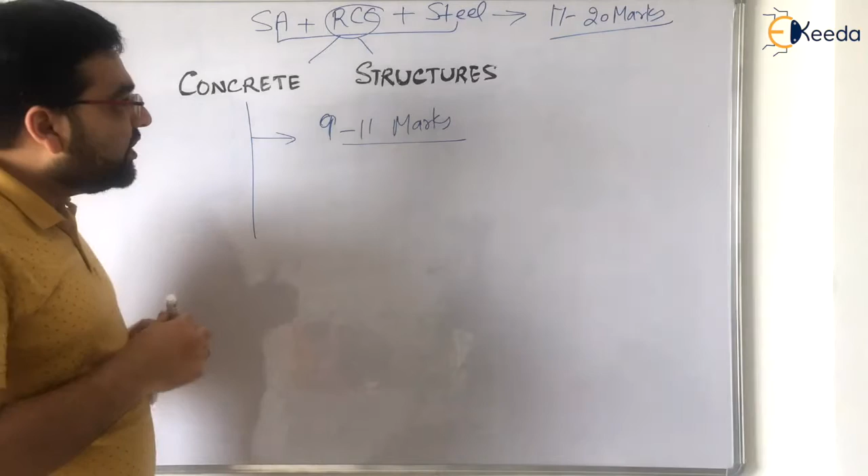If I consider RCC or concrete structures alone, it carries around 50 to 60% of those marks. That means out of 17 to 20 marks, concrete structures or RCC will carry around 9 to 11 marks. This is very important. I have seen people with good command on RCC or concrete structures get a very good rank in GATE examinations. This subject carries around 9 to 11 marks, and this year too it has around 8 to 9 marks. This year's 2020 GATE, and previous years, it has had a huge weightage. So we will focus on concrete structures and secure as much as possible.

Now, in concrete structures, the first lecture would be about cement, its manufacturing and types. You will also study cement in building materials, but I will teach you the topics important for designing concrete structures, for example shrinkage, creep, and other properties. You must also know the IS code specifications - IS 456-2000. We will be using IS 456-2000, this is the Bible of concrete structures.

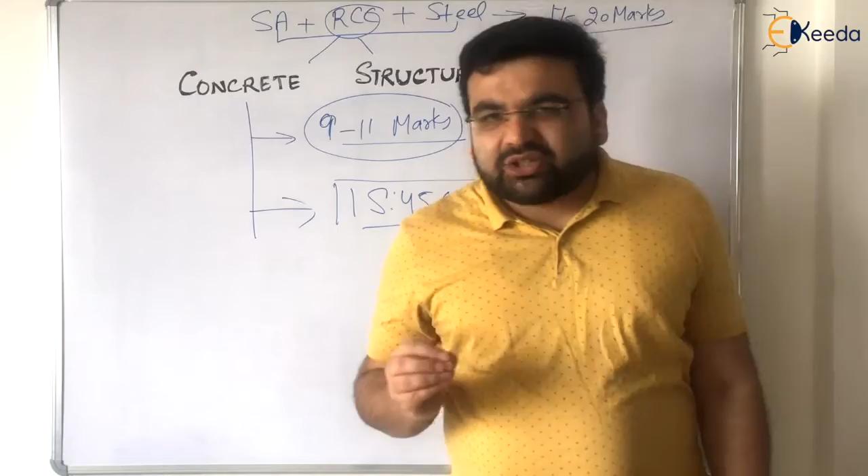IS 456-2000 - whoever is watching my video and doesn't have a hard copy, I strongly recommend going to a photocopy shop or downloading it from the internet and getting a hard copy of IS 456-2000. Remembering every clause of IS 456-2000 is almost next to impossible. Even toppers cannot remember every clause because it's a very thick IS code. But I will teach you only those clauses which are very important from the GATE point of view, in detail. Otherwise there are a lot of clauses and it will be very difficult to remember all of them.

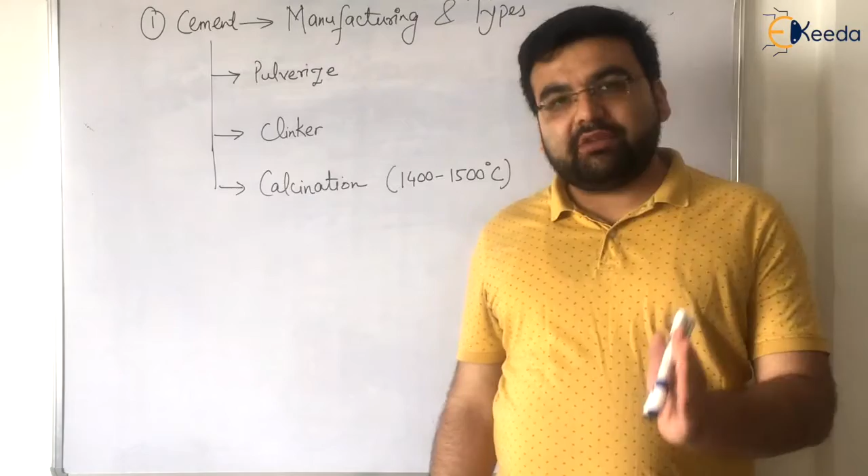Now let me start with concrete structures. The first lecture I will teach you is about cement manufacturing and types. Let me tell you about the first topic in RCC, reinforced cement concrete structures - cement manufacturing and types. First, let us know what cement is. You must be knowing, since you are in civil engineering, that cement is the basic of civil engineering. Every concrete structure has a basic constituent in it known as cement.

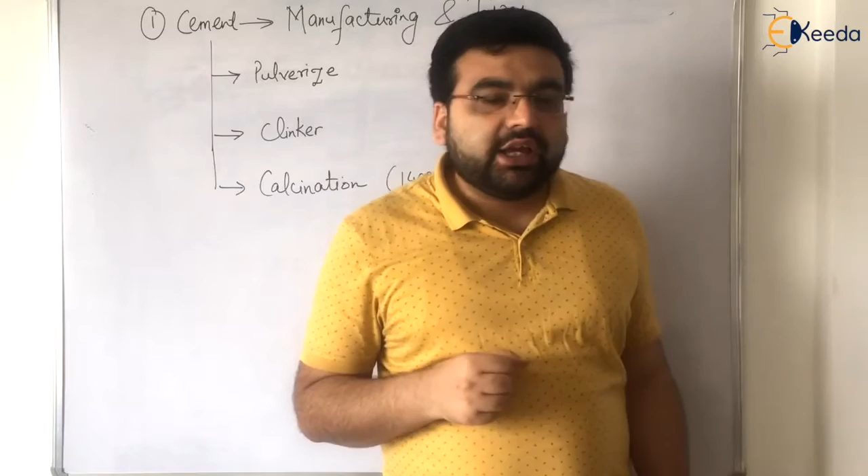Now what is cement? What type of role does cement play? What is meant by cement? Cement is basically a mixture of argillaceous as well as calcareous compounds.

I will tell you about that - what is argillaceous, what is calcareous.

Cement acts as a binding material - this is very important. You know that in concrete you have aggregates: fine aggregates, coarse aggregates, water and other constituents. You can also have admixtures, mineral admixtures, chemical admixtures - a lot of things depending on the type of cement. Now, cement plays a very important role: it actually binds all the particles.

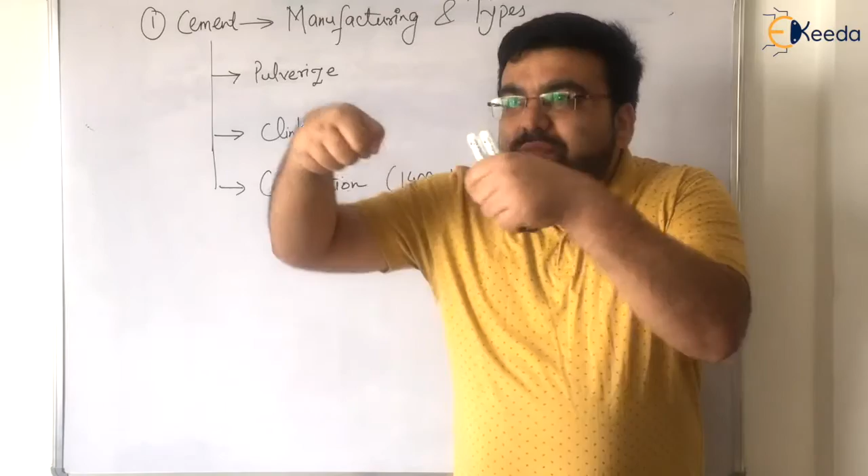For example, let us say you have two rods and you want to make an angle. How will you make an angle? You will connect the two rods and do welding. Now if you don't do welding, is it possible to make an angle? No, not at all. It is not possible to make an angle without either bolting or welding.

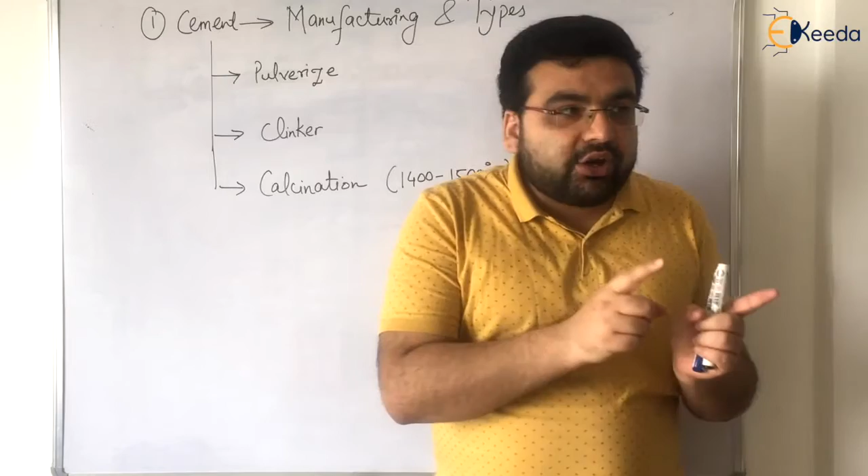Similarly, you cannot form concrete, you cannot form PCC or RCC. PCC means plain cement concrete, RCC means reinforced cement concrete which has steel in it. It is not possible to make these two without the help of cement. So cement actually plays as a binding material of all the particles.

For example, let us say this is cement, and let us say this is RCC. It has steel rods in it, it has cement, it has aggregates - everything, right? Now these are the aggregates.

You add some water as per Abraham's law, the water-cement ratio. Now the cement actually binds the particles, like with the rod, through interparticular attraction. It binds the particles - without cement, you cannot form concrete. So cement is very important.

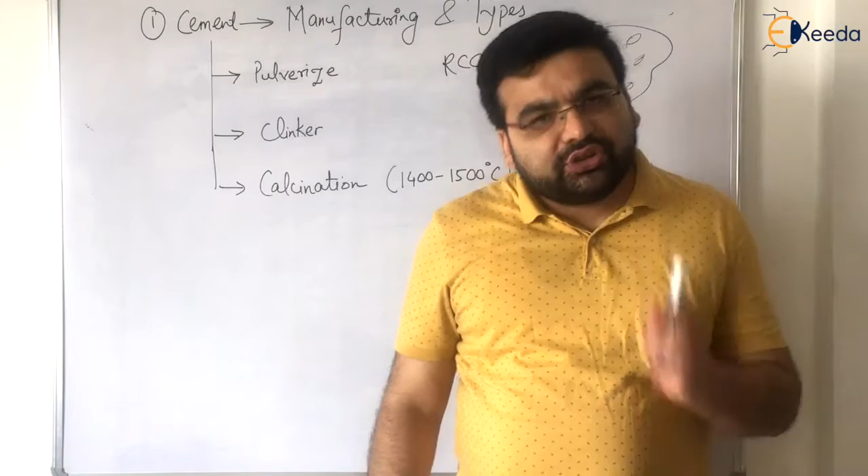When I am teaching you about cement, it should be known to you how cement is manufactured - what are the constituents of cement, and if we increase the amount of a particular constituent, what will be the effect of that constituent on the properties of concrete. All these aspects must be known to you.

So starting with cement - how is cement formed? Now if somebody asks you what is cement, you will say that cement is basically formed by pulverization of clinker followed by calcination. Again I am repeating: pulverization of clinker followed by calcination. This is the basic definition of cement.

Now let us focus on these three points. First is pulverize - what is pulverize? Pulverize means basically breaking, that is pulverization, breaking of particles. Cement is formed by argillaceous as well as calcareous compounds. Argillaceous means which have major component of alumina in it. Calcareous have more component of calcium in it. So cement is formed by argillaceous plus calcareous compounds.

Now, what is clinker? Clinker is a powdered form, not a very fine powder - it can have coarse powder also, a mixture of both fine as well as coarse particles. So clinker is basically a powdered form.

Now, what is calcination? Whenever you hear this term calcination, always remember we have to heat it. So we have to heat it at what temperature? This question has been asked many times - not in GATE examination, but in other examinations. At what temperature does calcination take place? Always remember, it is between 1400 to 1500 degrees Celsius - this is important.

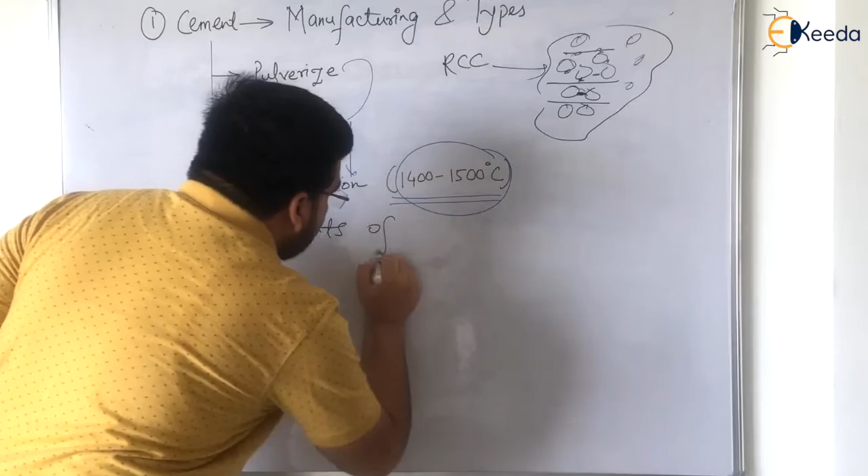Components of cement. Now let me explain you the components of cement.

Cement has lime, alumina, silica, magnesia, and iron oxide also. Now, the important question is what is the percentage of all these elements? That is very important for you to learn. I will explain a trick by which you can learn all these components. First, let me tell you what the components are, their percentage, and plus what is the role of that particular component in cement.

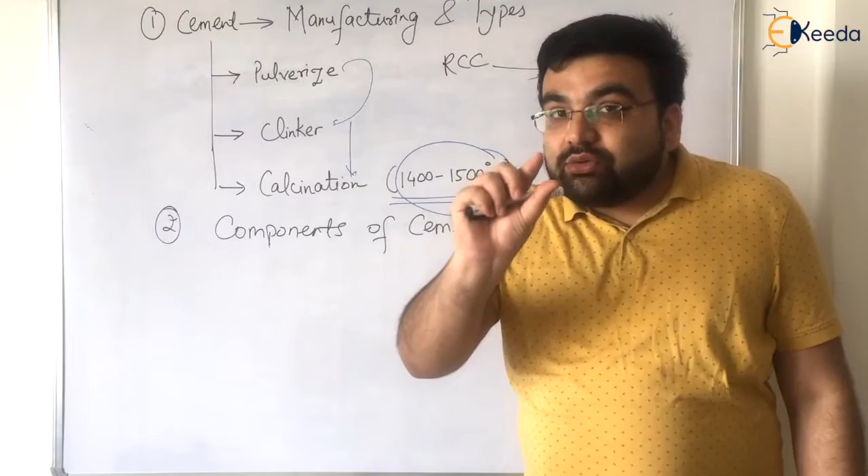For example, some component provides color, some provides hardness, some provides strength, early strength, late strength. So what is the function of that particular component? I will explain you that.

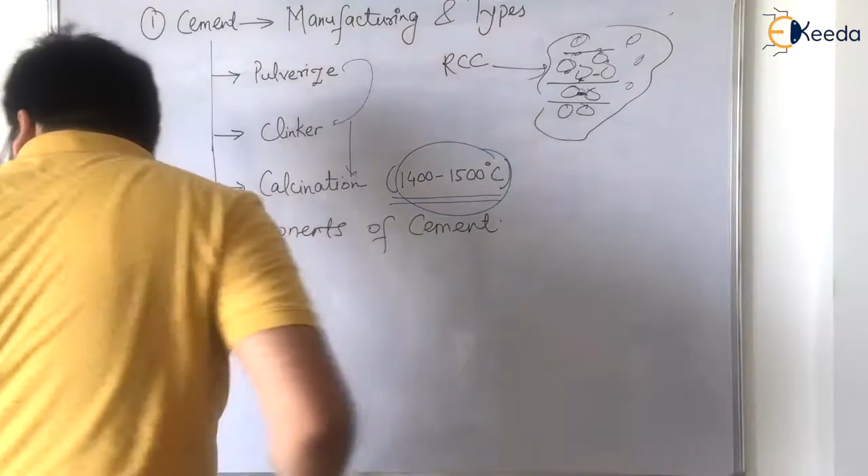Okay, so first of all, let me write down what are the components in cement. Let me rub it and write it down. Components of cement. Now I have written all the components which are present in cement.

Now let us discuss each and every component one by one, because this is important. This has been asked many times. Okay, now the first one is silica, SiO2.

The percentage of silica is in between 17 to 25%. If somebody asks you the exact percentage, just tell him it is around 20%. But the percentage varies between 17 to 25%. Now the function of silica is that it provides strength to cement.

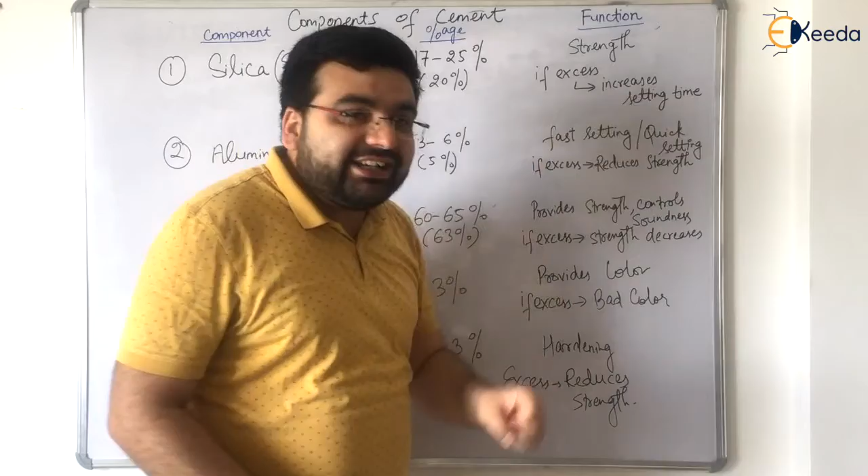But sometimes the percentage of silica is in excess, meaning more than 25%. Then what will it do? It will increase the setting time. Why have I written 'in excess'? Because this question has been asked 2 or 3 times in GATE examinations, previous years like 1996, 1997, older GATE exams. So this question has been asked: what will happen if silica is in excess in cement? It will increase the setting time.

Second component is alumina, Al2O3, aluminum oxide. The percentage of alumina is in between 3 to 6%, to be more precise around 5%. What does it do? It decreases the setting time, or you can say the cement sets quickly due to the presence of alumina.

Now if alumina is in excess, what will it do? It will reduce the strength. This question has not been asked yet, but still I have written it, because they might ask this question in the near future. So if it is in excess, it will reduce the strength.

Now the third component is lime. The percentage of lime is the highest. This question, which component has the highest percentage in cement, the answer is lime. This question has been asked many times in state exams, sometimes in ESE examination also. So it's important that the highest percentage in cement is of lime, CaO. Now what does it do? It provides strength and controls the soundness.

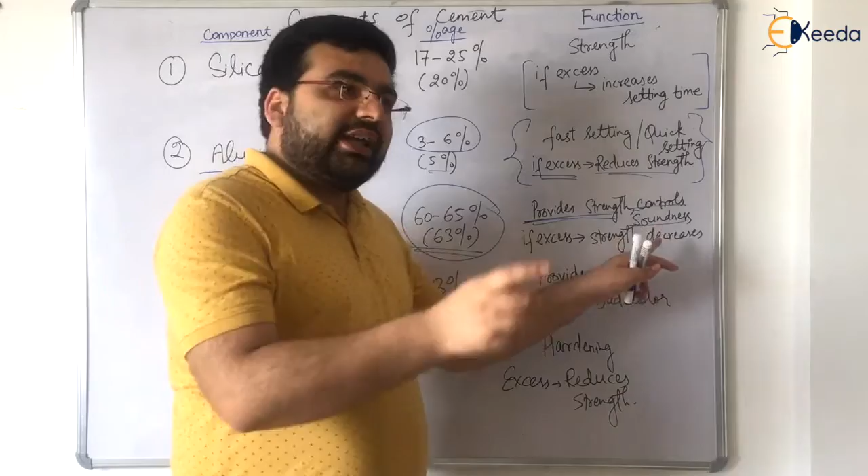For example, let us say you have concrete. If the temperature is very high, what will happen? The moisture component will evaporate, the water will evaporate from concrete. What will happen? It will shrink. So basically, this shrinkage or expansion of cement is known as soundness. Why does it happen? It happens due to the weathering action. For the time being, just remember that due to the weathering action, the expansion or contraction of concrete or cement is known as soundness.

Now if lime is in excess, what will happen? It will decrease the strength. This is important. Now the next one is iron oxide.

Now regarding iron oxide, for the time being I am explaining about cement, but in future whenever you have any question regarding color, I'm repeating: in any question, if there is something mentioned that color is due to a component, the answer most probably will be iron oxide, because iron oxide plays a very important role in imparting color to cement.

So it provides color, but if it is in excess, what will happen? It will give you bad color, okay? And the percentage, it is nearly 3%, right?

Next one is magnesia. It is in between 1 to 3%. What does it do? It provides hardness to cement. But if it is in excess, obviously it will decrease the strength, it will reduce the strength.

Now, the important thing is, I told you that I will tell you a trick to remember this, because silica, alumina, lime, sometimes you might forget it. What is the trick? Now remember this thing:

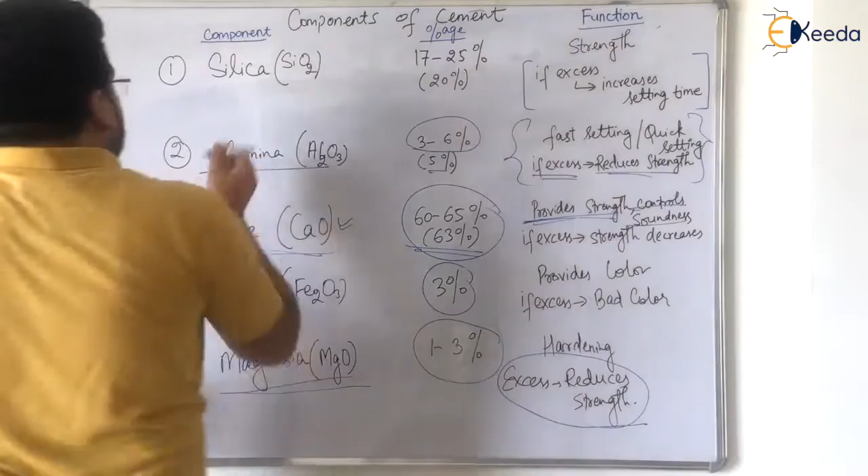SALIM. It might be the name of your friend, the name is Salim, right? So just remember this name: SALIM. S means silica, A means alumina, L means lime, I means iron oxide, M means magnesia.

Just remember this thing, and you will remember the percentage also. How to remember the percentage? You can form any phrase, because when I was in college, I used to make a lot of names like Salim, right? Similarly, you can remember this also.

For example, it is 17, so 17 let's say is S. This is 3, let's say it is T. 6, now this is S. 3, this is T. And this is again 3, T. So S T S T T. Similarly, you can make your own.

But this thing you have to remember, that is Salim, right? Because when you are in examination, there is huge pressure, so it becomes difficult to remember, or you might forget iron oxide, you might forget lime, anything you might forget. But if you remember the name, you can easily write down the answer and recognize it. So Salim is the keyword, and that is how you remember the percentage. You can make your own.

Now moving to the next part. Apart from these basic components, cement also has some additional components like gypsum, silicon trioxide, and other components also. So now let us discuss these other components and what are their functions. Now let me rub it.

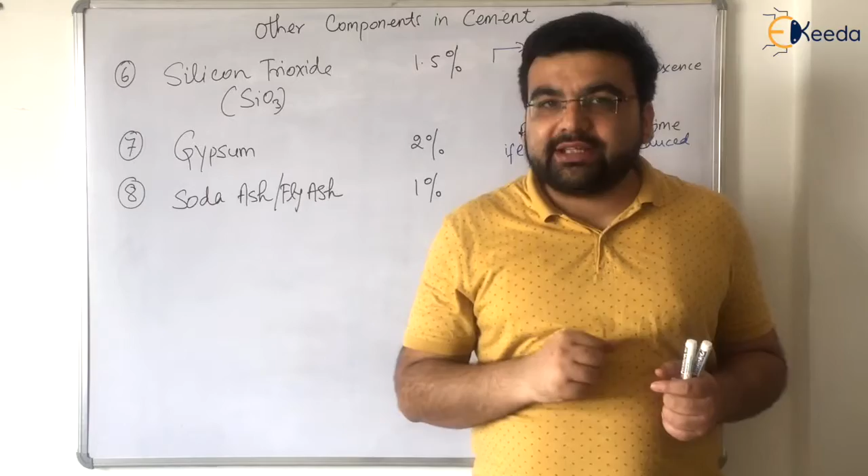Now this is very important, because in GATE examinations they are not asking you the usual questions, like what will be the effect of alumina. Everybody knows that. But they will ask you about some exceptional things. So this is the basis of GATE examination, right?

Now other components: we have silicon trioxide, SiO3. It has a very minimal content, around 1.5%. What it does is it helps in the fusion of clinker. Fusion means, for example, you have argillaceous as well as siliceous compounds. You heat the clinker, which is known as calcination, and at that time, there should be a fusion. So silicon trioxide helps in fusion.

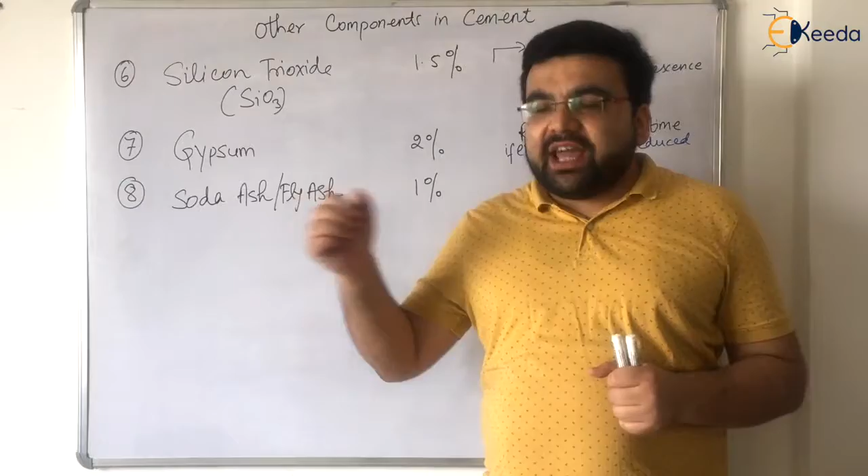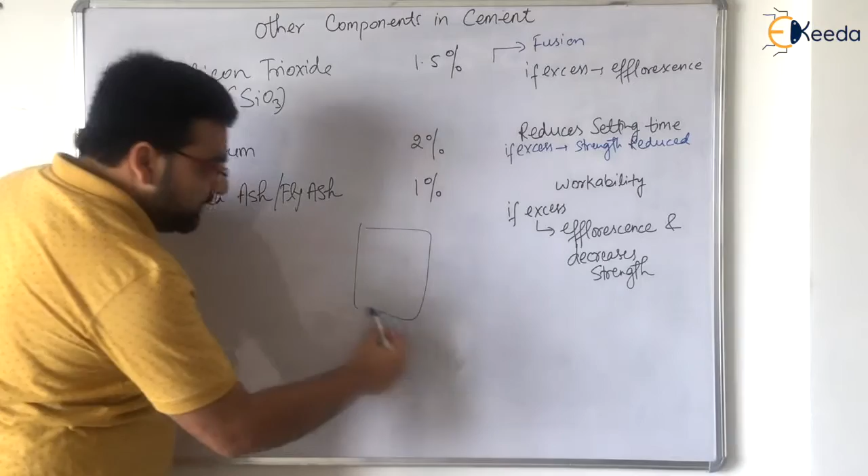But if it is in excess, efflorescence will happen. Now what is efflorescence? For example, a newly built house is there. After 4 to 5 days, if it has not been painted, you go to the house and you will see that on the wall there will be some powdery substance accumulated over the surface. That is basically some salty components coming out. That procedure is known as efflorescence. So if silicon trioxide is in excess, it will cause efflorescence.

Now coming to the next component, that is gypsum. This is important, this question has been asked many times, even in GATE examination and other examinations. The quantity of gypsum should be around 2%. If it is in excess, it will reduce the strength of cement. Now, the question which has been asked is, what is the effect of gypsum on cement? What it will do is reduce the setting time.

Now the question is, what is meant by setting time? For example, you have concrete, and concrete has cement in it. Now suppose concrete has been laid over a surface during monsoon season. You don't want that cement to be in a rough stage for a longer period of time, because rain can wash it away. So at that time you need fast setting cement.

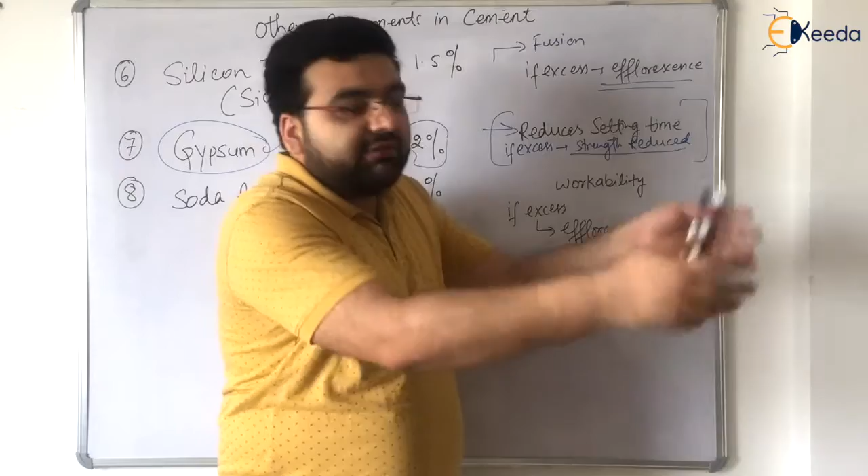So if you want fast setting cement, you must have some gypsum in it, because it will reduce the setting time. Once the structure has set, it is not yet hardened, but it is set. It means that if rain comes, the water will flow away and will not get penetrated into the concrete structure. So that is the meaning of reducing the setting time.

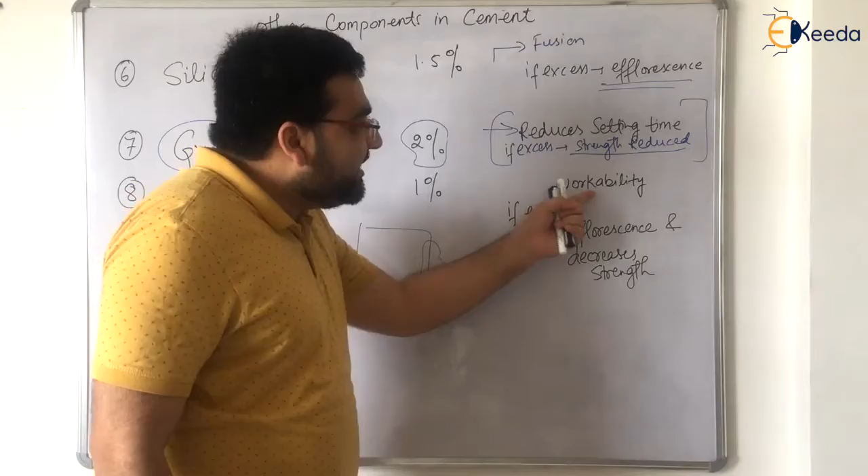Now next is soda ash or fly ash. They are present around 1%, and what they do is increase the workability. Now, what is workability? For the time being, in simple sense, workability is the ease of handling concrete. For example, if someone says this concrete is highly workable, it means you can pump the concrete to a longer distance. If it is lower in workability, you cannot pump it to a larger distance.

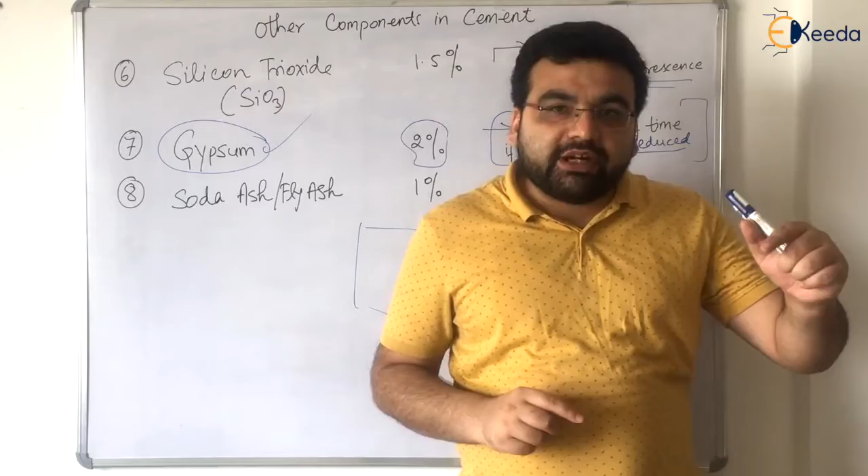Workability is majorly affected by the water cement ratio. If it has a higher water cement ratio, workability will be high; if lower, workability will be low. And workability is inversely proportional to strength. If a particular concrete has higher workability, it will have lower strength, unless you have added some admixtures. If it has lower workability, it will have higher strength. We will discuss that also, but for the time being, fly ash accelerates the workability.

Now if it is in excess, efflorescence will come again and it will decrease the strength. So these are the effects of some other components.

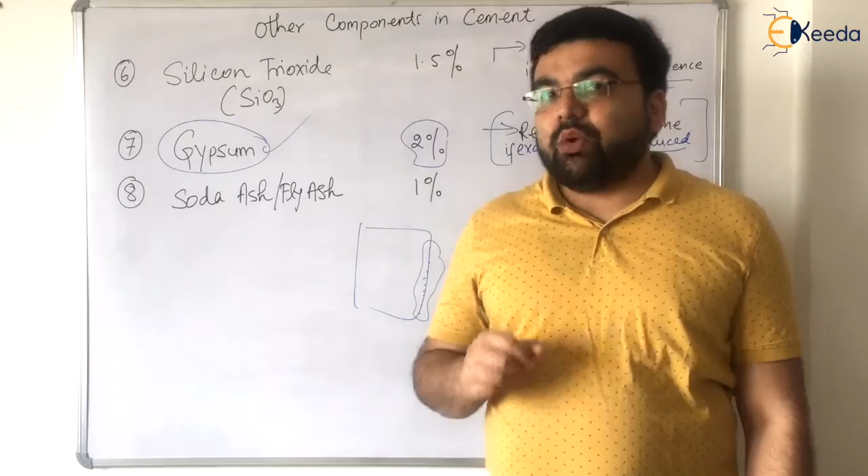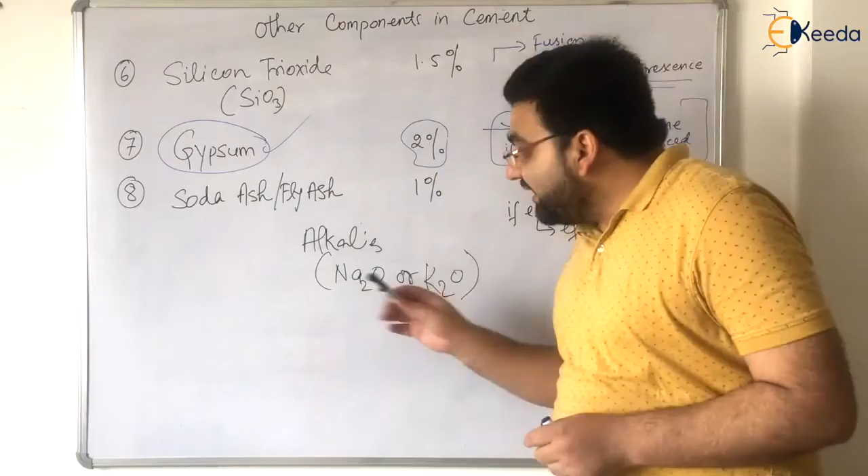Now one question was asked a few years back in the GATE examination: if some alkalis are present in cement, what will happen? By alkalis, I mean Na2O or K2O or something like that. If alkalis are present, what will happen to the cement? They will reduce the setting time. Remember this: if alkalis are present, they will reduce the setting time. So this is the effect of alkalis on cement.

The next topic is hydration of cement. Now what is hydration? You must know this from class 12th also. If you add something to water, an exothermic reaction takes place. That whole reaction is known as hydration. Hydration means adding water and getting an exothermic reaction. Similarly, in case of cement also, what will happen?

You must have done these experiments in your college also. If there is cement and you add some water, an exothermic reaction will take place. What is an exothermic reaction? It is the reaction in which heat is evolved. So similarly here, cement plus water gives an exothermic reaction.

Now, why am I focusing on this word exothermic? Because a question was asked a few years back: if you decrease the temperature of the surroundings, listen carefully and apply your brain, will the reaction of cement be hastened or slowed? Just apply your brain. A lot of you must have told me the reaction will take place at a faster pace. The answer is correct.

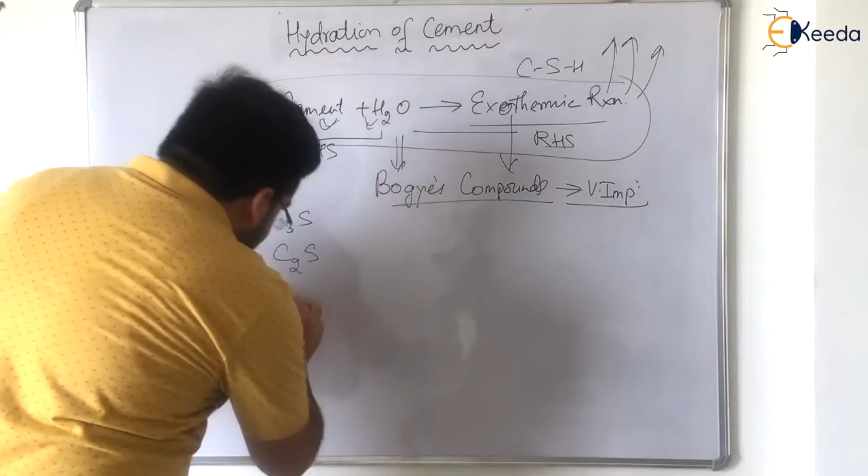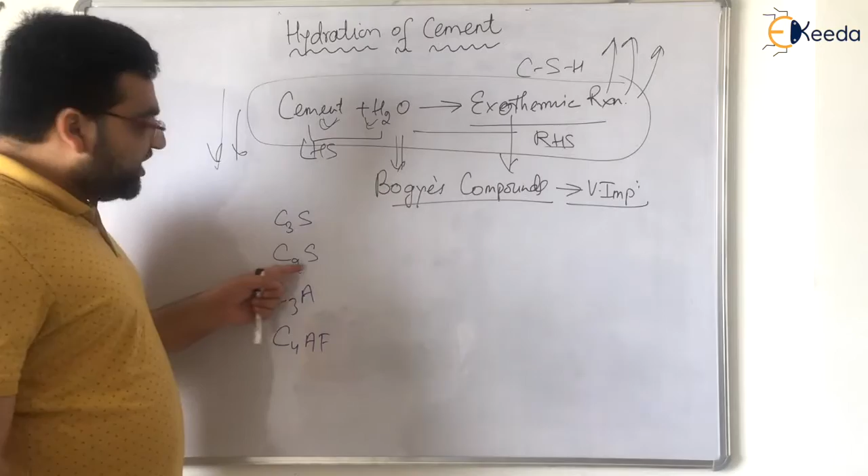Bogue's compounds, there are basically 4 Bogue's compounds, and they are known as C3S, C2S, C3A, C4AF. Tricalcium silicate, dicalcium silicate, tricalcium aluminate, and tetracalcium aluminoferrite. So these are the 4 Bogue's compounds, right?

If you add water in cement, I am repeating, an exothermic reaction will take place, and that exothermic reaction will lead to the formation of these 4 compounds. These are known as the Bogue's compounds, named after the scientist who discovered them. So first is C3S, tricalcium silicate, C2S dicalcium silicate, C3A tricalcium aluminate, and C4AF tetracalcium aluminoferrite.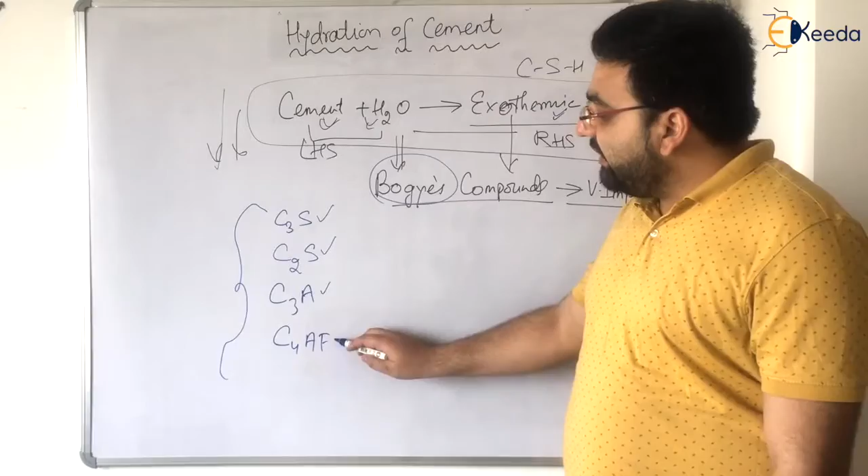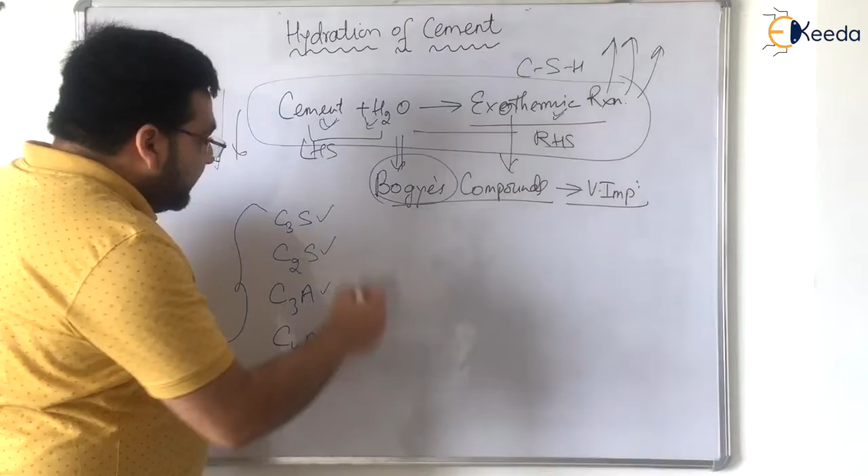Okay, so this was okay, a lot of you must be knowing. Now, what a lot of you must not be knowing is that these components have certain names. These components have certain names.

This is known as alite. This is known as belite. This is known as celite. And this is known as felite. Just pardon me if there is some spelling mistake. So alite, belite, celite, and felite.

This is important, because till now not even a single question has been asked based on the name of these components, that is alite, belite, celite or felite. What questions do they ask in the GATE exam? They ask if C3S is more, what will happen? If C2S is more, what will happen? But if they ask, if belite has more concentration, what will happen, then a lot of students get confused. Then what is belite?

So what is belite? Belite is C2S, dicalcium silicate. What is alite? That is tricalcium silicate. Just remember it, that is A, B, C, and F. This is 3, this is 2, this is 3. Just remember these two, 3 and 2.

Alite for C3S, belite for C2S, celite for C3A, and tetracalcium aluminoferrite, F for ferrite. So just remember it like this, you will remember it. I have remembered it like this only: A, B, C, F - alite, belite, celite, and felite.

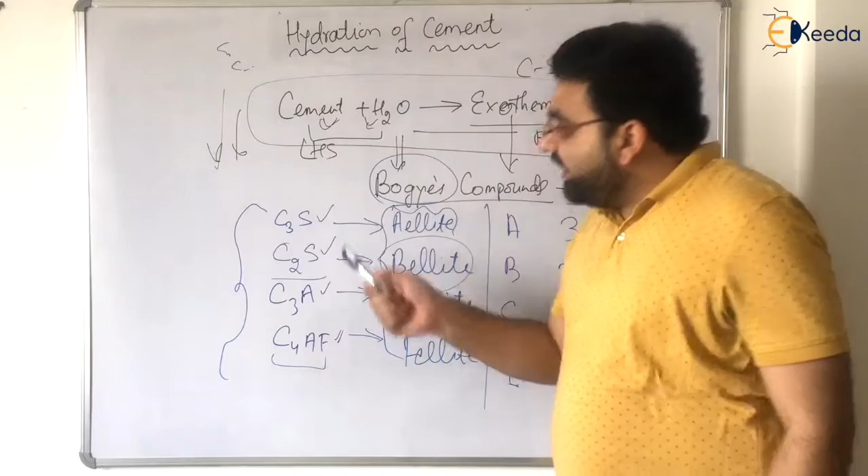Now, the most important part is what is the component. For example, let us see you have cement. If you add water, it will be an exothermic reaction. Now, what is the percentage of all these components and what is the function of all these components?

That is important because these questions are asked many times. Even in 2020 GATE also this question was asked, it was shift 1, right? It was asked what will happen if C3S is more. I don't exactly remember the question, but it was like this - if you decrease the C2S, then what will be the effect on strength, something like that. You can go to the GATE site and you will get the question.

So the effect of Bogue's compounds, the percentage of Bogue's compounds and their functions, I will explain now. Going to the next part, what is the percentage and what is the function of these Bogue's compounds? Let us discuss. So these are the Bogue's compounds which I have already told you: alite, belite, celite, and felite.

Now, before noting down, first of all don't make notes. I will be explaining, after that you can pause the video and make the notes. Now, first of all, understand, first is the alite. The percentage of alite is in between 32 to 35% around.

Okay, now it gives hardness and strength in initial days. This is important - even I got confused when I was in college about what is meant by initial days. Obviously, I am an engineer, there should be a time frame for a particular thing. If somebody says this is very heavy, how much heavy? 100 kgs, 150 kg, what is heavy, right? Similarly, if somebody says initial days, it means 1 to 14 days. This is the initial days.

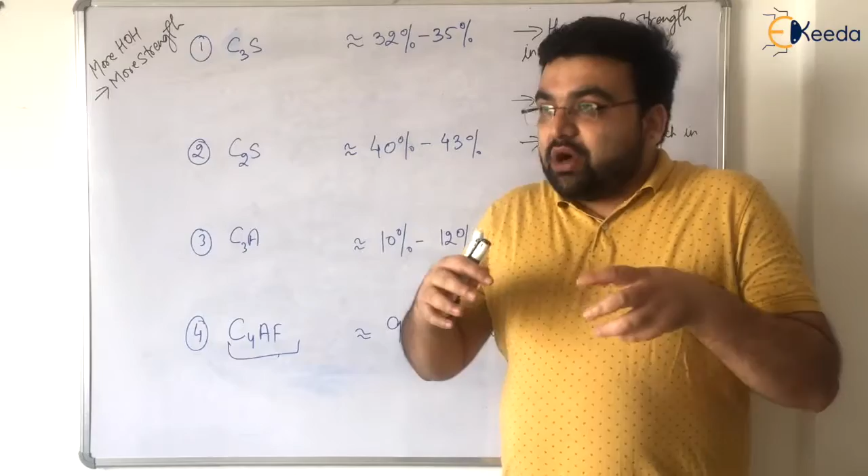For example, let us say you have cement, you have added some water, an exothermic reaction takes place, and all these four components are formed. Now, in initial days, the component responsible for the strength is alite, C3S. In later days, because you know cement gains its strength up to 1 year or even 1.5 years - you must have done experiments in college, 7 days strength, 28 days strength, 14 days strength, even 1 year strength. So as the time period increases, the strength also increases. But in initial days, meaning up to 1 to 14 days, only alite or C3S, tricalcium silicate, is responsible for the initial day strength.

But in later days, after 14 days, the component responsible is belite or C2S, dicalcium silicate. Now, C3A, tricalcium aluminate - what does it do? It quickly hardens the cement concrete. The fourth one is C4AF, tetracalcium aluminoferrite. Its percentage is between 9 to 10%. It quickly sets the cement concrete, but it does not have any effect or impact on the strength of concrete.

Now the second important thing is about the heat of hydration. Just remember, addition of water in cement is an exothermic reaction - heat is evolved, but all these components have different contributions towards the heat. The highest heat is evolved by C3A, tricalcium aluminate - around 864 kilojoules per kg. Now remember one thing which is very important: heat of hydration is directly proportional to strength. The more heat of hydration, the more strength.

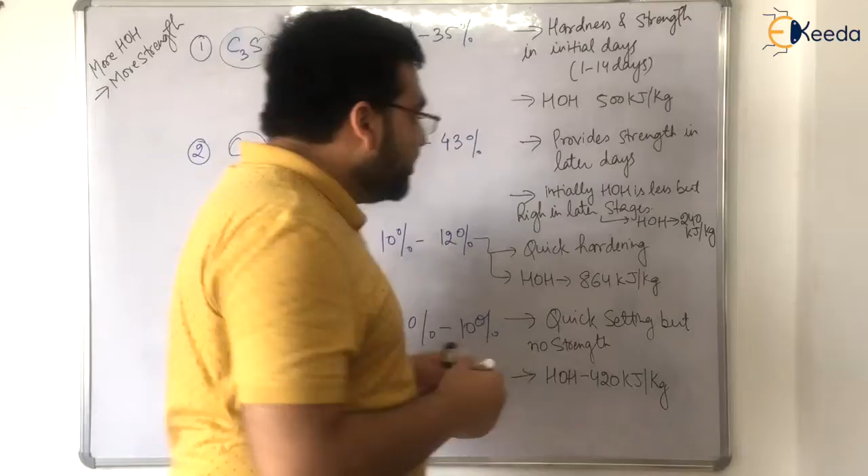Now, questions which have been asked from this table are that you have to arrange the components as per the heat of hydration. So which has the highest heat of hydration? C3A - it is highest. After that, the next one is C3S. Then you have C4AF. And at the end, you have the least one, that is C2S.

This is responsible for the later days strength. This is the table which has been asked many times: C3A has the highest heat of hydration, then C3S, then C4AF, and at the end the least heat of hydration is C2S.

Now coming to the next topic, which is the CSH gel. What is CSH gel? Let me explain. C means CaO, S means SiO2, and H means water.

Now what happens is that cement has gypsum in it. Let me write down the formula for gypsum: CaSO4 into 2 times H2O. You have gypsum, you have aluminous compounds, you have siliceous compounds — a lot of components are there.

When you add water, Bogue compounds are formed. But do you think Bogue compounds form separately, like here C3A, here C4AF? No, all this will be in a mixture, and that mixture will be in the form of a gel. This gel type of structure that is formed is known as CSH gel.

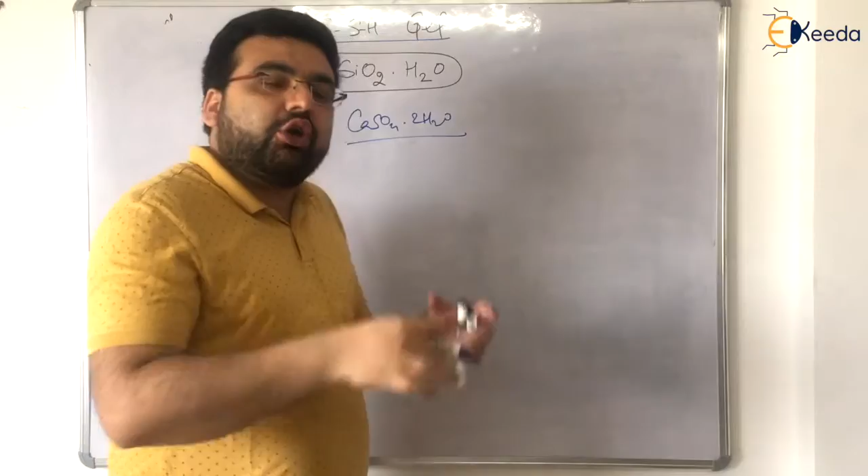Now the important thing is, you have CSH, and this gel type of structure is responsible for the strength of the concrete or the strength of the cement. Now, about the Bogue compounds.

First one is alite. If water reacts with alite, it forms 75% of gel. But if water reacts with belite or dicalcium silicate, it is responsible for 99% formation of gel. This is very important — the thing I am telling you is very important.

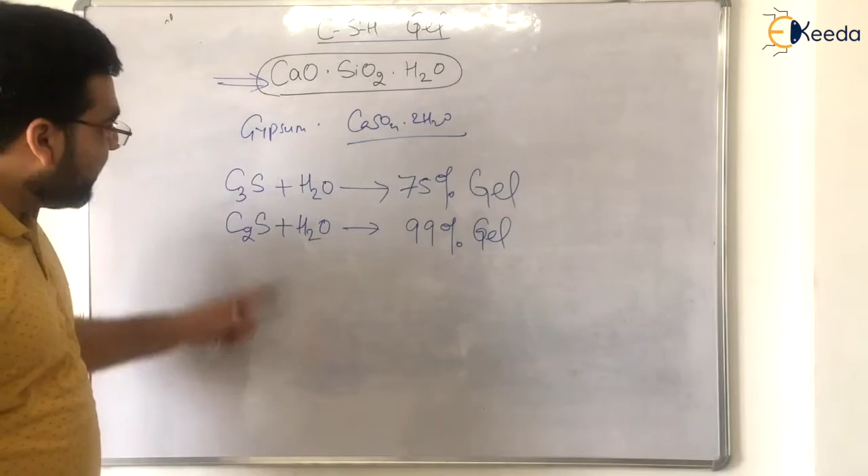Why? Because one question was asked a few years back. If tricalcium silicate or alite reacts with water, it forms 75% of gel. If dicalcium silicate or belite reacts with water, it forms 99% of gel, plus some amount of calcium hydroxide is also formed.

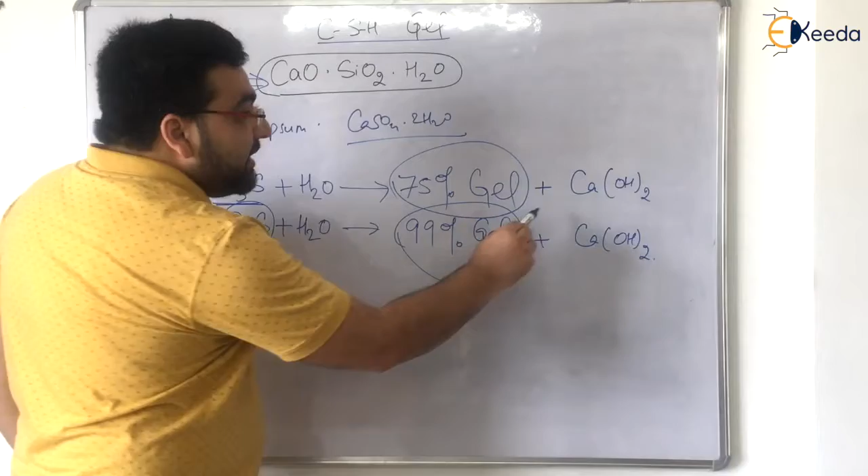The reason I am writing this is that C2S forms 99% of gel, C3S forms 75% of gel, and it has been found by experiments that when water reacts with C3S, the percentage of Ca(OH)2 is more as compared to when water reacts with C2S. This is the only reason, I am repeating, why C2S strength is greater than C3S.

First reason is 99% gel formation. Second reason is calcium hydroxide is formed in a smaller amount as compared to C3S. So this is the only reason why C2S has greater percentage strength as compared to C3S, because in the table C2S is about 40% and C3S is about 30%, as I told you. That is the only reason.

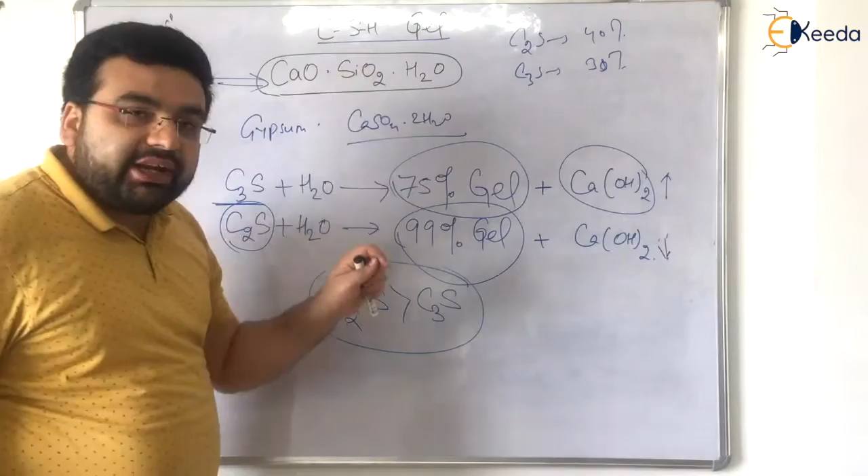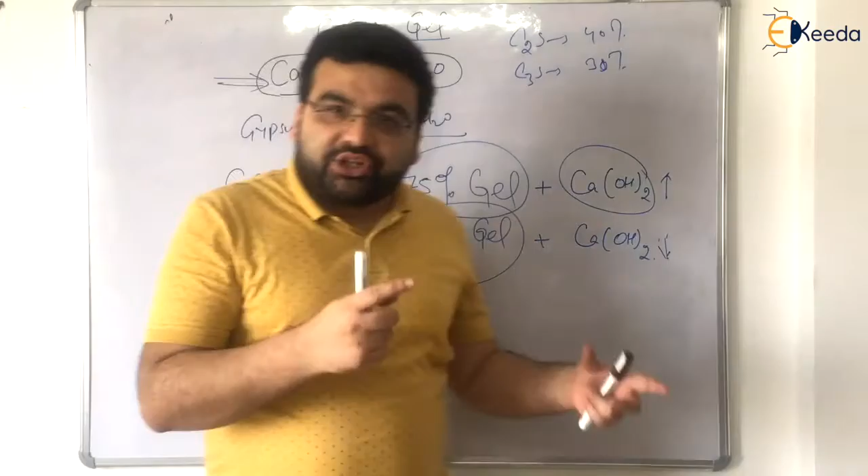Now, next topic is the addition of water. If you add water to cement, obviously cement is not a solid structure — it has some pores, some voids in it. So some water is used by cement for hydration and some water is used for filling the pores. Now let's see how much water is used for each.

The percentage is: 23% of water is used for hydration, and around 15% of water is used for filling pores. So in total it comes around to 38%. So if somebody asks what percentage of water is used in cement, you will say around 38%, meaning the water-cement ratio will be around 0.38.

Okay, now this is not exact — it depends upon Abraham's law. Abraham's law says there is a particular graph for the water-cement ratio, determined based on how much strength you want, and how much the water-cement ratio should be. That depends on Abraham's law, which I am not going to teach you here — some other faculty will teach you that in other videos.

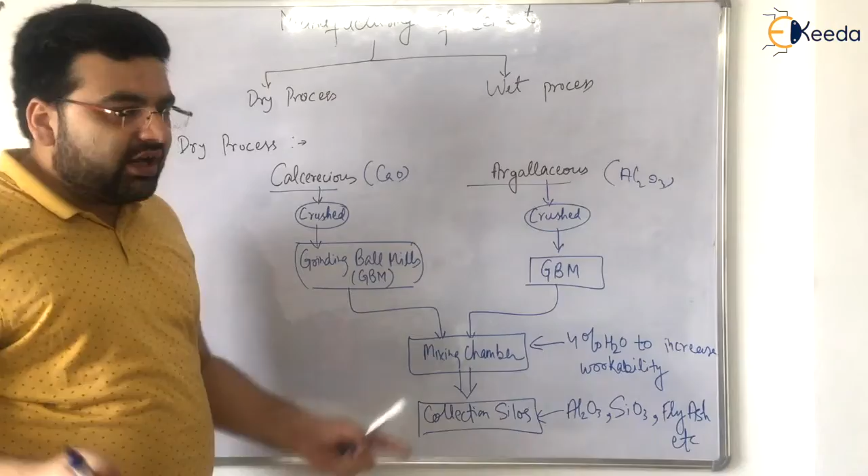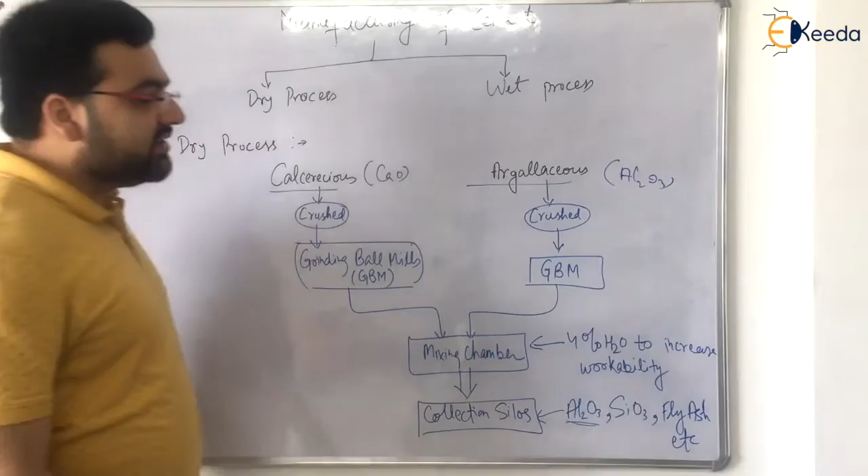After the mixing chambers, these components go to collection silos, which are big containers. All the mixed components go to the collection silos. There we add aluminium oxide, silicon trioxide, fly ash, etc. If you want to add some admixtures also, you can add them in the collection silos.

After the collection silo, the whole mixture after addition of alumina and all again goes to a mixing chamber where all these components are mixed again. After the mixing chamber, this is important - questions have been asked many times in GATE examination about the rotary kiln.

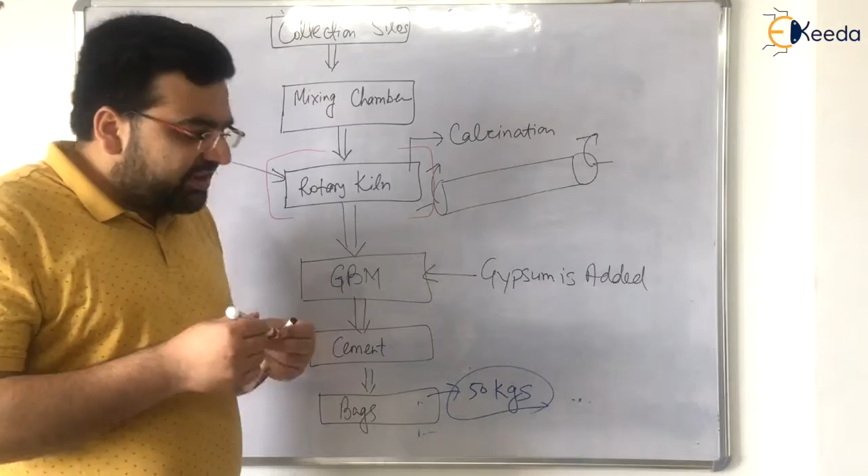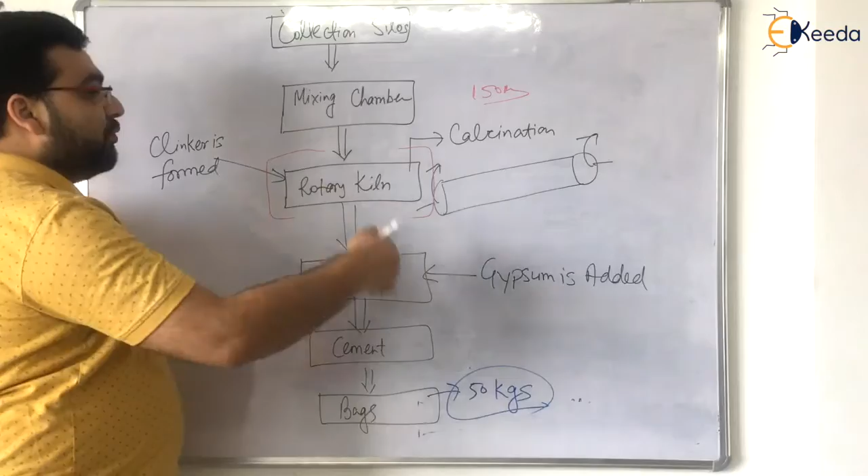After the mixing chamber, it goes to a rotary kiln. The rotary kiln, you must have studied in BTech also - it's a very big kiln, its length is around 150 meters. It keeps on rotating at a particular revolutions per minute. All these components are fused together in the rotary kiln, meaning the calcination procedure takes place.

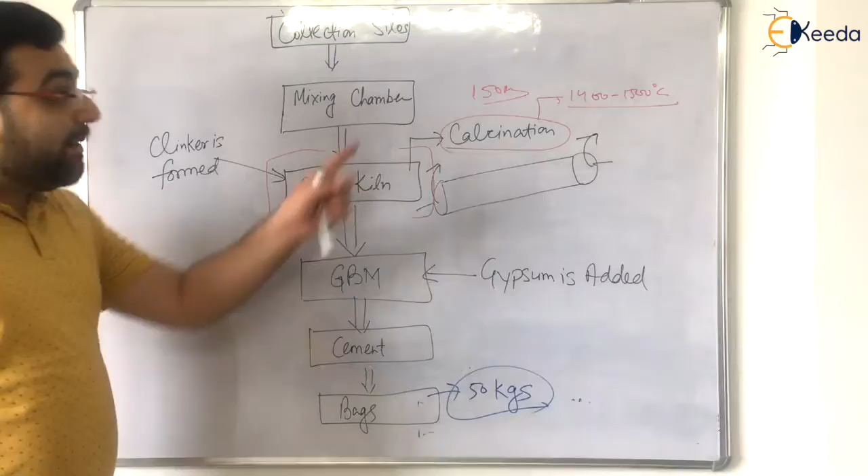Now what is calcination? I have already told you. What is the temperature for calcination? It is 1400 to 1500 degrees Celsius - this is important. All this fusion takes place in the rotary kiln. This question has been asked - where does calcination take place? It takes place in the rotary kiln.

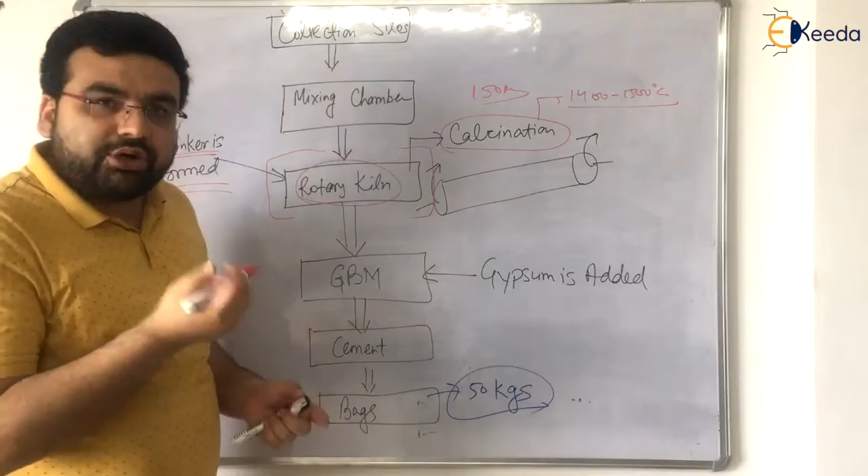In rotary kiln, clinker is formed. What is clinker? It is a powdered form - not very fine, not very coarse, a normal powdered form. After the rotary kiln, it again goes to the grinding ball mills where it is grinded again because it is not yet a proper powdered form, it is a clinker form, a coarse form. After smashing it there, it is formed into a powdered form.

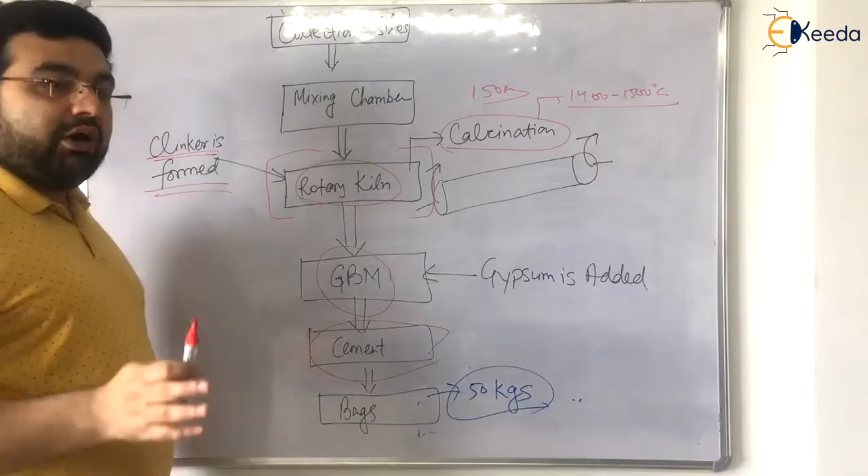After the grinding ball mills, your cement is manufactured. Now when you go to markets, you get your cement bag. What is the weight of the cement bag? That is very important, being a civil engineer - it is 50 kg, that is the weight of cement.

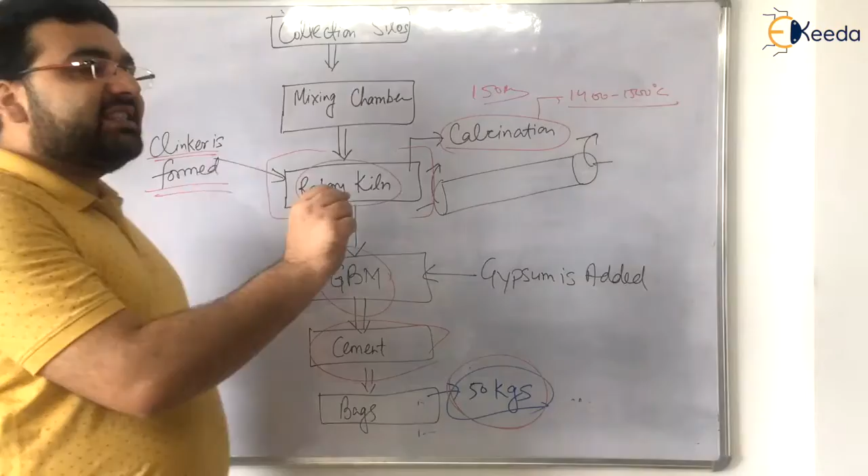Now if somebody asks you what is the density of cement - every cement, whether it is rapid hardening cement or some other, has different densities. But for the time being, a normal cement which we use in daily life has a mass density of 1440 kilograms per meter cube.

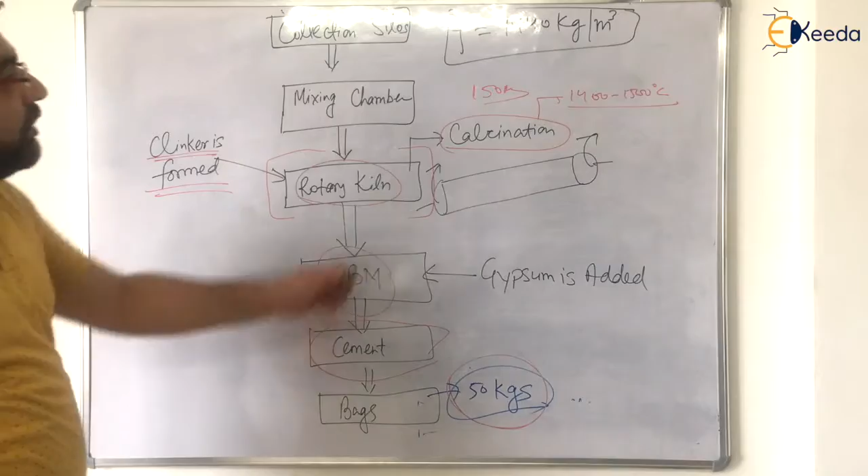1440 kilograms per meter cube - that is the mass density of cement. Cement, not concrete. If somebody asks you what is the mass density of PCC, PCC means plain cement concrete, which does not have any reinforcement in it. So the mass density of PCC - this was for cement only.

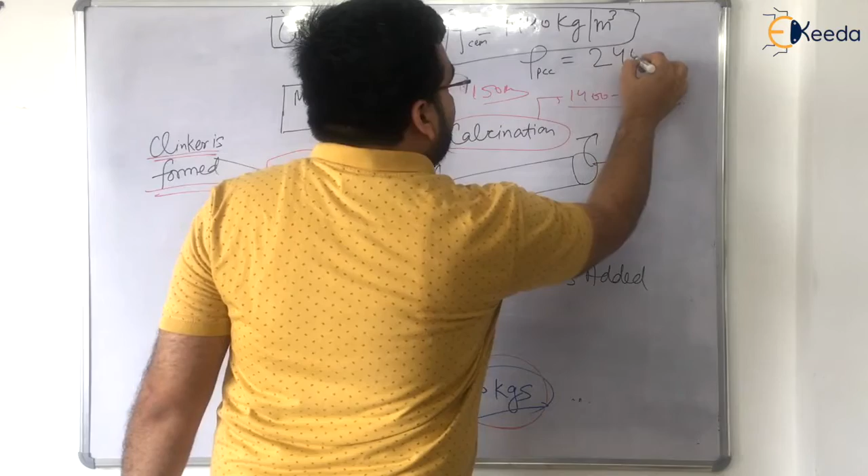For PCC it is 2400 kilograms per meter cube.

If somebody asks you what is the mass density for RCC - RCC means it has reinforcement also, right? For RCC it is 2500 kilogram per meter cube. But for the time being, when we will be discussing the design of beams, design of columns, we will be using this. But for now, it is 1440 kilograms per meter cube.

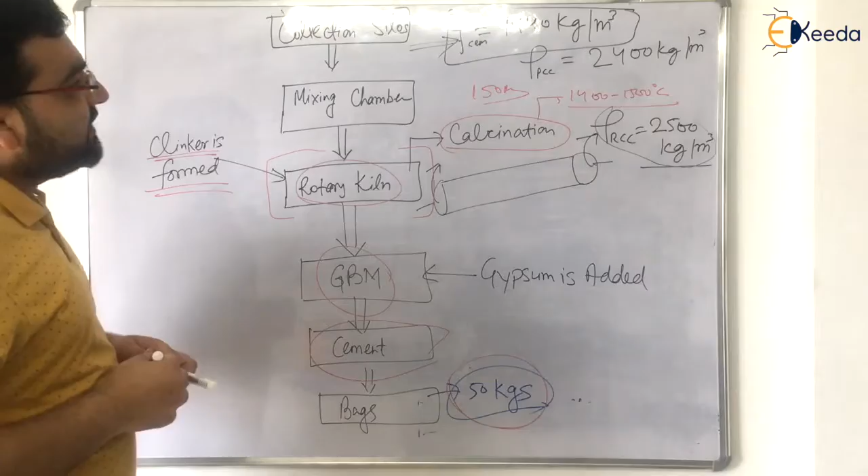If somebody asks you that a 50 kg bag has how much liters or how much meter cube - what is the volume of a 50 kg bag, how will you determine it?

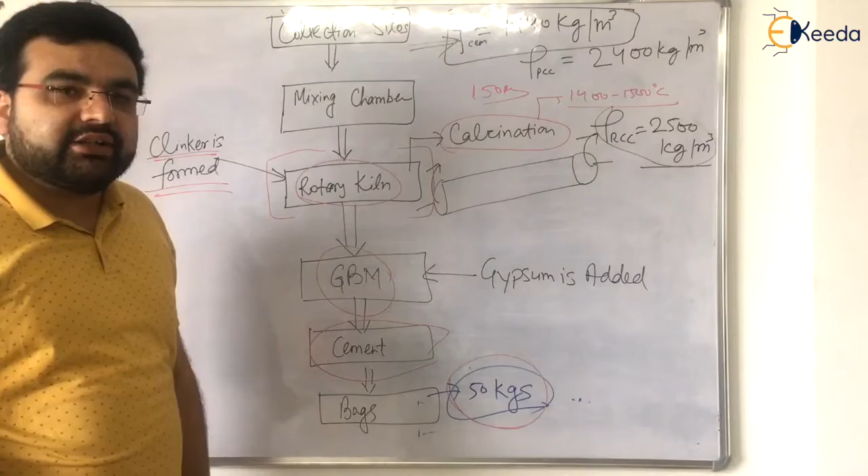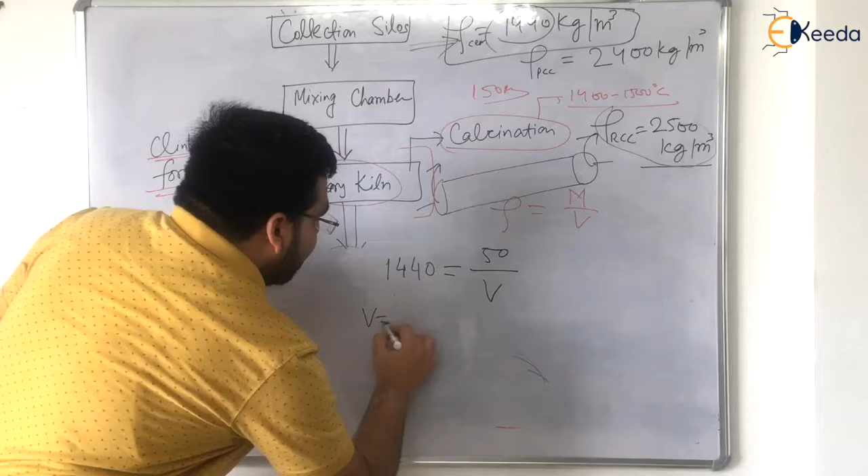Simple. You know that density equals mass per unit volume. Let me rub this and explain. Now, density equals mass per unit volume. How much is the density? It is 1440. So 1440 equals mass divided by volume. How much is mass per bag? 50 kgs. So 50 divided by volume. How much is volume? That I don't know - let us say it is V. So V will be equal to 50 divided by 1440 meter cube.

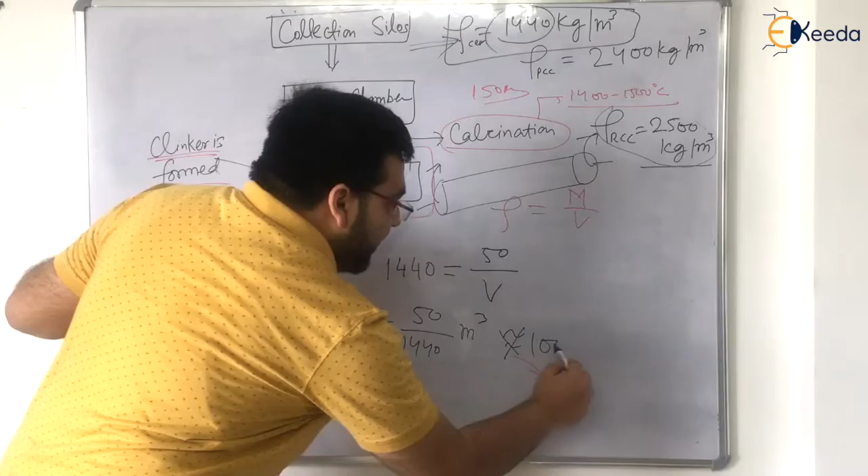If you solve it, you will get it to be around - if you convert it into liters, if you multiply 1 meter cube by 1000, it will come out in liters - it will come out to be roughly 34.7, or you can say 35 liters. Remember this: one bag of cement which we buy from the market has a volume of around 35 liters. This is important, okay?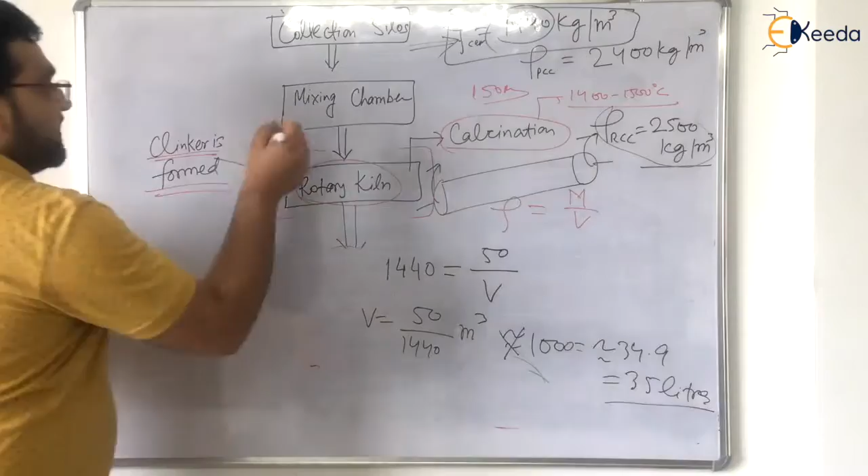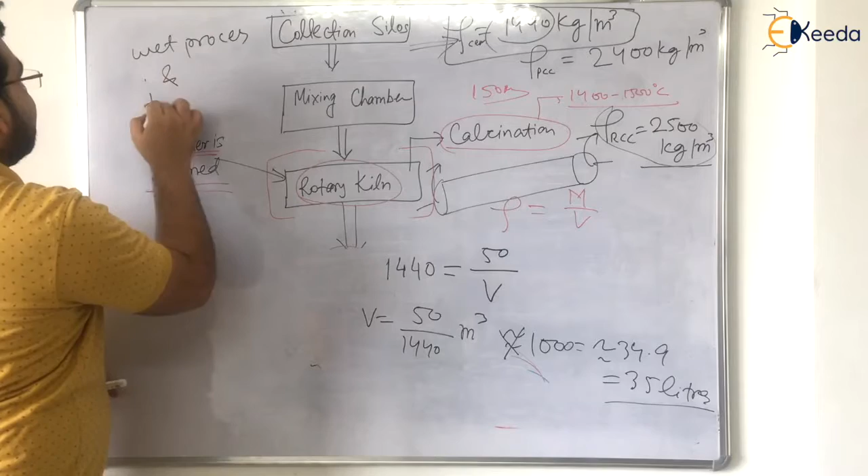So in the next videos, I will be telling you about the types of cement - not types of cement, the wet process, and then types of cement. Next video I will be talking about the wet process and type of cement. Now let us discuss the wet process and the types of cement.

Now let us discuss the wet process of cement manufacturing. In wet process everything is the same. Now the name wet means that some amount of water is involved - I will explain where. In wet process, same as the dry process, calcareous as well as argillaceous are used. What is calcareous? Which has calcium. Argillaceous, which has alumina in it. Both of these are grinded - calcareous also grinded - but the argillaceous in wet process, before grinding, is basically washed.

So here water is involved. In dry process there was no washing. Now why is it washed? It is washed to remove the extra alumina in it. Now it is washed, again it is grinded, then they are mixed, then a raw slurry is formed. This is important - this question was asked few years back in some exam, I guess some state PSC exam, asking in which process raw slurry is formed: dry, wet, or some other options. So raw slurry is basically formed in the wet process, okay?

In this process, bigger machines are involved, like the elevators—it's a very big machine. You have to elevate the raw slurry. So bigger machines alternatively increase the cost of the process, or manufacturing of cement.

That is why we do not use the wet process as much as the dry process. Generally we are using the dry process. Now, after explaining the manufacturing of cement, the question is: what are the types of cement? I already told you that in this topic we will discuss manufacturing as well as types. So manufacturing has been discussed. Now coming to the types of cement.

Now all these are theoretical questions. Whatever I have taught you till now, most of the questions are theoretical. Only a few can be numerical. For example, I told you about the mass density of cement, around 1440. If somebody asks what the change in volume would be if the mass density changes, these types of questions can be numerical. But 99% of the questions are theoretical from this topic, which I have already discussed with you line by line, including the types of questions asked in GATE examinations.

Now the next topic is the types of cement. The first type is ordinary Portland cement. As is clear from the name, it is ordinary—nothing special has been added. Neither is it rapid hardening nor low heat; it is an ordinary cement. Whatever percentages I told you earlier, all those percentages are in this cement.

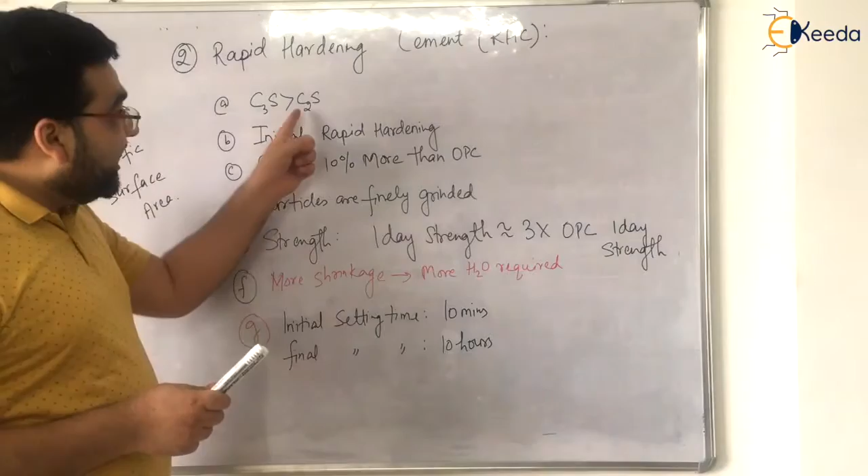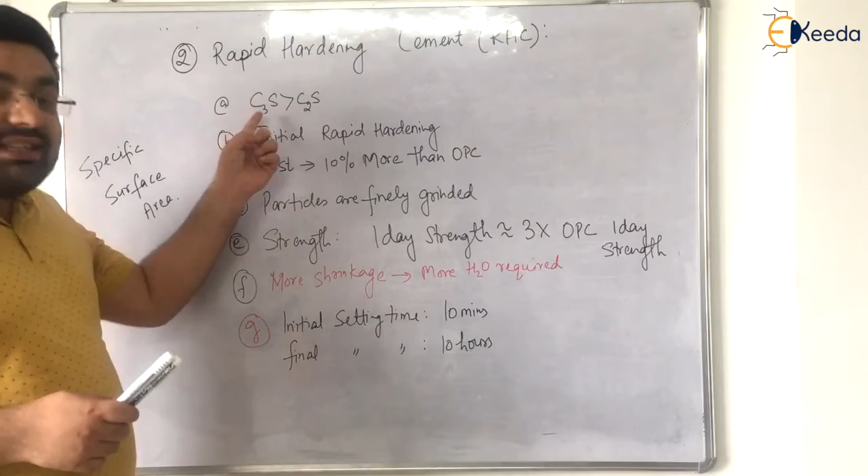Now, if you want rapid hardening cement, then the percentage of C3S should be greater than C2S. But in ordinary cement, I have already told you C2S is always greater than C3S. What is the reason? Again repeating: C2S gives more gel structure, around 70%, and it gives less heat of hydration compared to C3S which gives more heat of hydration. So these were the two reasons why C2S is more than C3S, but in case of rapid hardening cement, C3S should be greater than C2S.

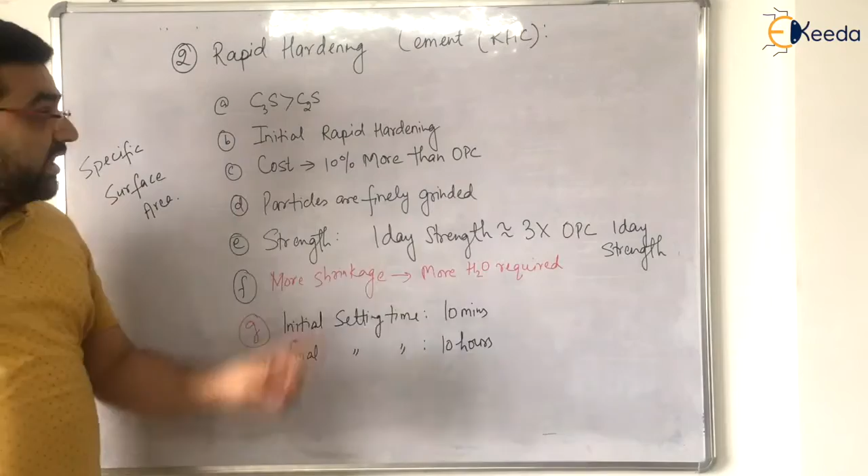Now let us discuss the properties of rapid hardening cement. The second property is initial rapid hardening, I have already told you. The third property is the cost of rapid hardening cement is 10% more than OPC. That is why we generally do not use rapid hardening cement. We use it only in those cases where initial strength is required.

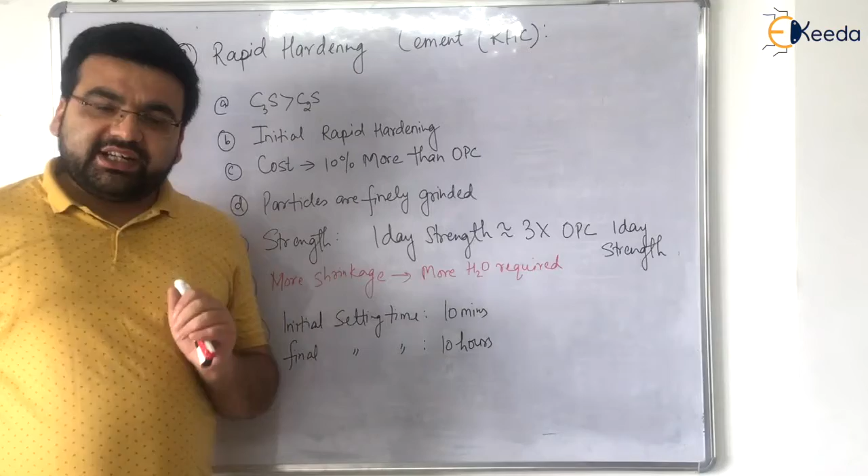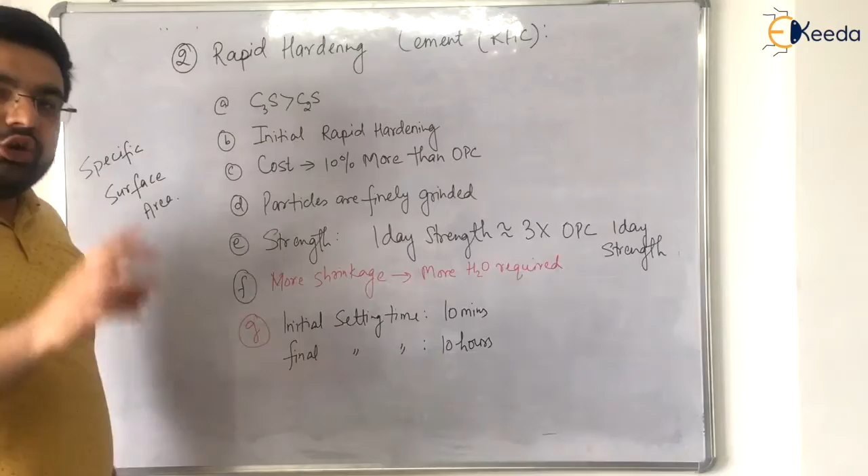For example, let us say you have a rigid pavement made by RCC. Now suppose there is some pothole in the rigid pavement that you want to repair, but traffic is continuously coming. Obviously you cannot stop the traffic for 7 days or even 1 day to let normal cement set. At that time you need rapid hardening cement - you stop traffic for 5, 10, or 20 minutes, repair the pothole, and then remove the barricading so traffic moves as usual. So at that time we use rapid hardening cement, not every time, only in special cases.

Fourth property is particles are finely grinded. Now, one thing is for sure. For example, let us say I have 1 meter cube of coarse aggregates, and similarly let us say I have 1 meter cube of fine aggregates.

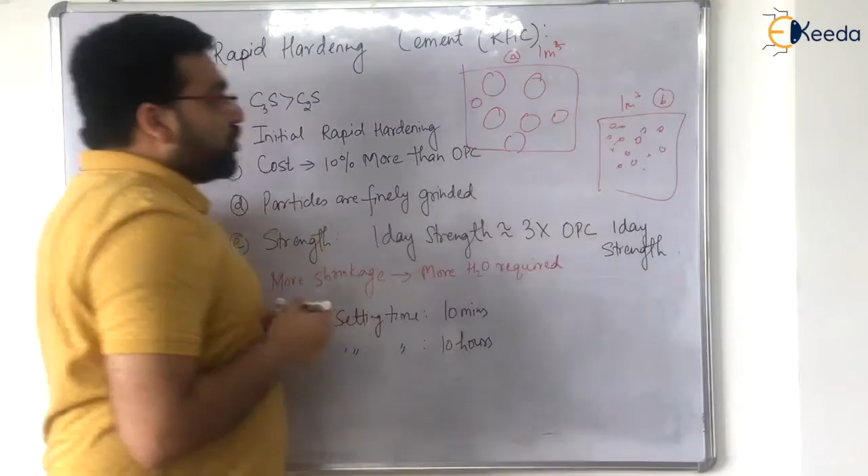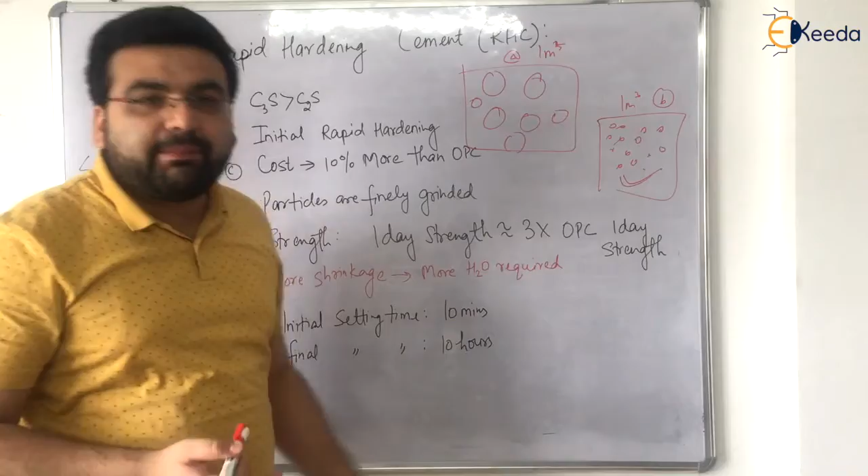Now just apply some brain. Let us say this is A and this is B. Which portion, either A or B, will have more surface area? Obviously the answer is option B, because for the same volume we have a larger number of particles, and if we have a larger number of particles, the surface area will be higher.

If the surface area is higher, remember the exothermic reaction I was explaining - if you add water to cement, an exothermic reaction takes place. So the reaction always takes place wherever you have surface exposed to water. If you do not have surface exposed to water, less or no reaction will take place. So between A and B, B has higher surface area, so more heat will be produced in B, meaning more exothermic reaction takes place. If there is more exothermic reaction, obviously there is more strength.

More strength, right? If more strength, then what will happen? There is some repercussion of strength. The con is that there will be much shrinkage and much prone to sulfate attack, right? So everything is interlinked, right?

So rapid hardening cement, the particles are finely grinded. It means that they have high surface area, and high specific surface area is directly proportional to heat of hydration. This is important.

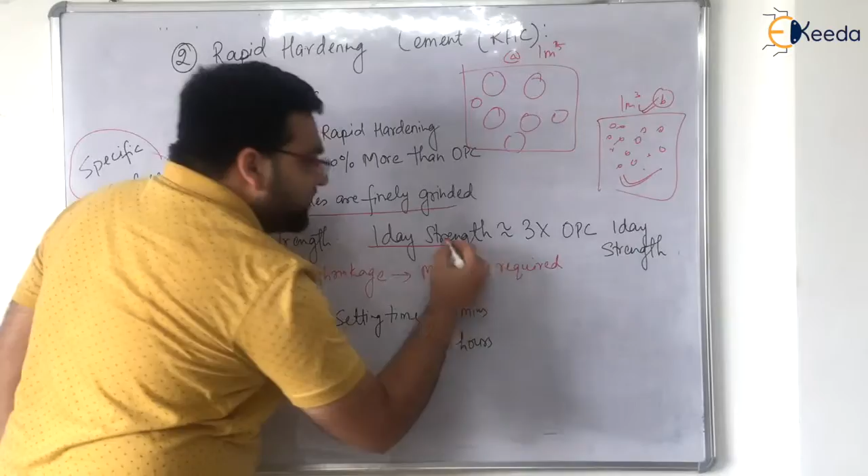Now fifth property is the strength of rapid hardening cement. The 1 day strength is almost equal to 3 times the ordinary Portland cement strength. Next one, which I have already explained you, is more shrinkage.

Why more shrinkage? Because particles are finely grinded. If more shrinkage is there, more water will be required. I will explain you later in concrete.

Now, initial setting time is 10 minutes and final setting time was 10 hours for rapid hardening cement. So that was all about rapid hardening cement.

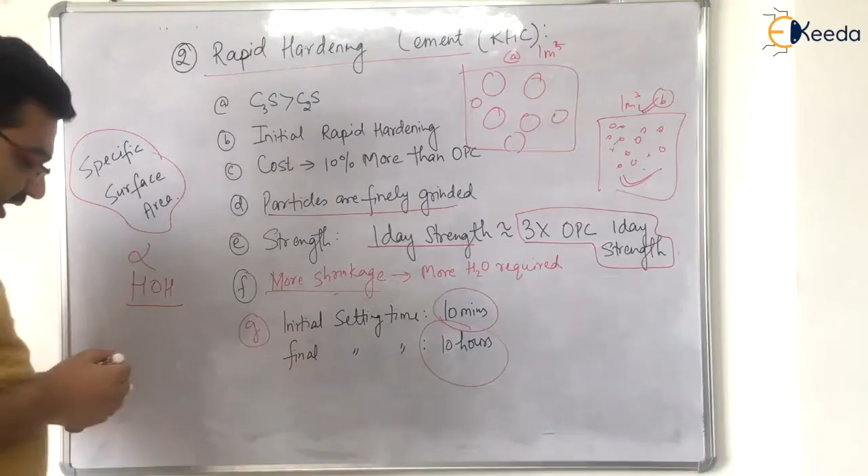So the next type of cement, the third type, is extra rapid hardening cement. As from the name, I have already told you about rapid hardening, in which tricalcium silicate was in greater content as compared to dicalcium silicate. Now, as far as extra rapid hardening cement is concerned, the question may be, so if I want to get extra rapid hardening cement, I have to increase the percentage of C3S again more.

But again, I have already told you, if you increase a particular constituent by some percentage, you have to decrease some other constituents, right? So to maintain the continuity, what we do is we do not increase the percentage of C3S much more, but we add some calcium chloride.

How much calcium chloride is added? So 2% of calcium chloride is added, extra, provided for the rapid hardening property. This is important. This question has been asked in a lot of examinations: in extra rapid hardening cement, which of the following is added? One option is calcium carbide, then calcium chloride, some other two options are also there. The correct option is calcium chloride, 2%.

Okay, next property is mixing and transportation time. Now, when you mix and when you transport, it is in a batch, then the total time you have got is only 10 to 20 minutes.

It means that if you are applying rapid hardening cement in a particular region, then the manufacturing site and the transportation site should not be very far. Otherwise, what will happen? The cement will set in the batch mixers itself, right? So it will be almost next to impossible to transport it to a larger area or larger distance. So this is a con of this, that the mixing and transportation site should be very close to the actual application site, because the time is very small, 10 to 20 minutes only.

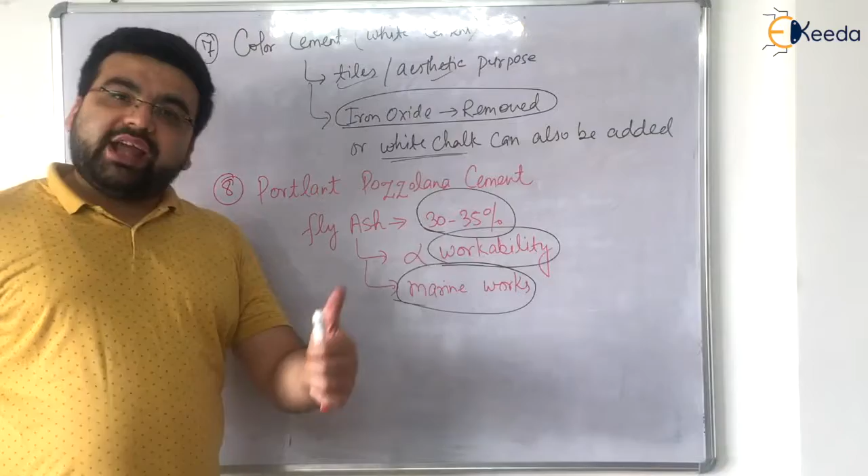In the subsequent videos, I'll be teaching you about aggregates, the coarse and fine aggregates, and later about concrete, the properties of concrete, IS 456-2000 recommendations, and a lot of things. Apart from these 8 types of cement, there are many more types of cement - whatever constituents you change, you get a different type. But these are not important from the GATE point of view. Whatever was important from the GATE point of view, I have taught you everything. So now let's move forward and discuss the aggregate, that is the coarse and fine aggregate.